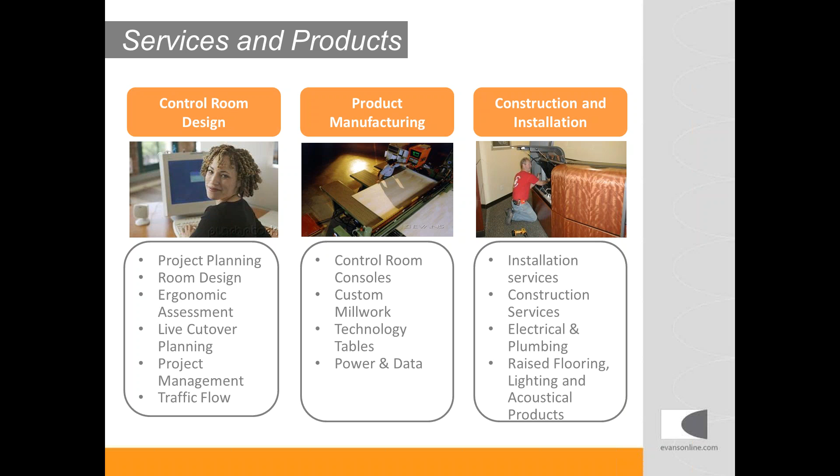We do project management, traffic flows, and then we have the core part of the business, which is product manufacturing - consoles, custom millwork, technology tables, power and data solutions, specifically designed for the 24/7 control room environment. And then we have a construction and installation team, ranging from installations of product to construction services within the control room - electrical and plumbing, raised flooring, lighting and acoustical - and we do this specifically for control room environments. So we're not a commercial construction company. We very much focus on control rooms themselves, particularly when talking about modernizing or upgrading an existing facility.

Our market approach: we approach the market by working either directly with end users, typically in a very early stage when they're talking about operational planning tasks and how they want to structure a control room. We will work with architectural companies who will hire us as a subject matter expert in control room design to help them complete the overall design package of a facility.

We'll work extensively with system integrators, large and small, depending on the size of the project opportunity. We'll work with general contractors who could be in the execution part of a project, EPC providers, and control room partners. So we do have very much a mixed approach to market. Again, this leads to exposure and a broad understanding of how the engagement and execution process of control rooms works.

So to get into the presentation, the role of the control room as we look at it is you've got several processes that influence the control room. You have information coming in, process control systems such as DCS, SCADA, etc. You have process requirements in a given facility on how it needs to operate, whether they're regulatory or business practices. And these things have to be interpreted by a control room.

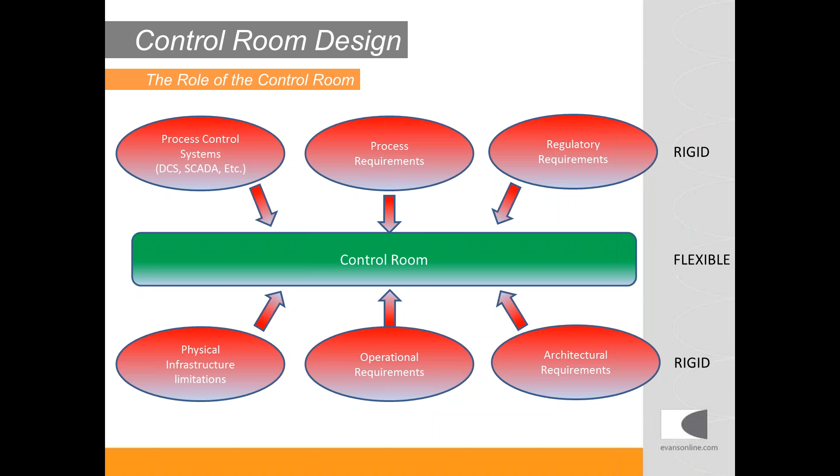One of the things to think about is that focusing purely on the operational aspect of a control room can have really bad effects on the operation. Today we're starting to see technology really increasing the flexibility and integrating incompatible control mechanisms into one, and we'll get into that a little bit later.

Looking at control room design early on in the process is very beneficial because it helps mitigate risks, but it also significantly reduces costs because early planning and being able to understand the implications of the control room design on operations can be very beneficial.

Things to look at are how a control room functions in normal operations, in upset process scenarios, what the emergency operation is, and looking at the continuity of operation. These are critical factors to be considered.

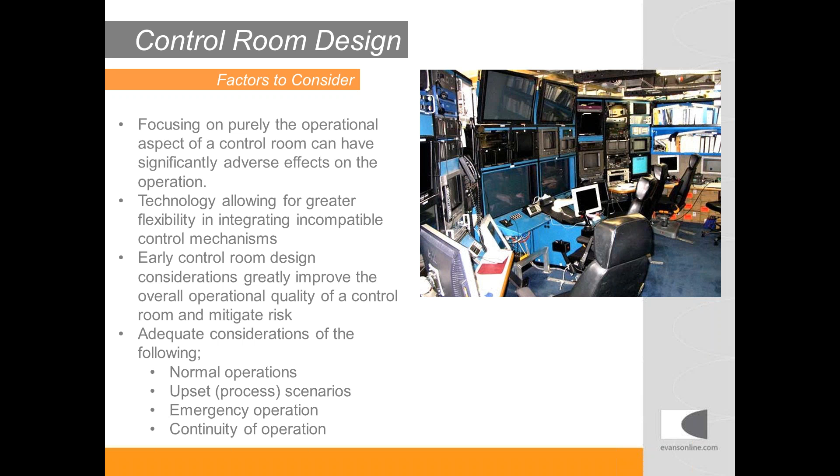I like this picture as a bad example of how to structure an operation, because as you can see, things are not well thought through. They're sort of just put in place. There are cables everywhere, the displays are not positioned properly. So taking all of that into account is vital.

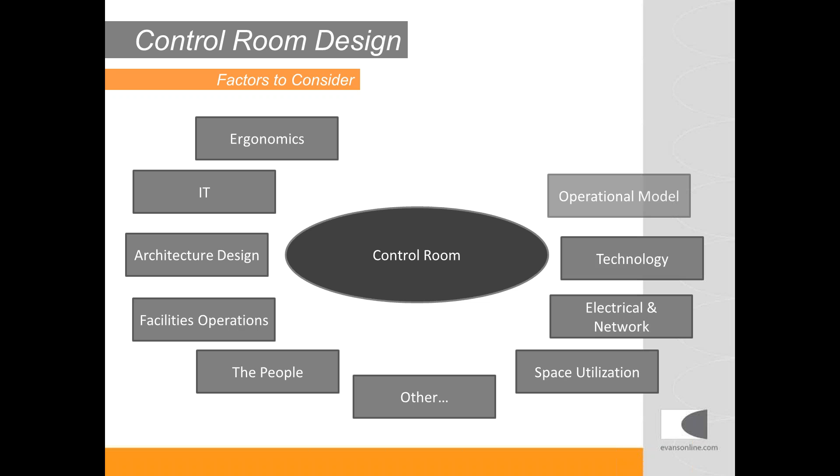When we look at the different factors that influence the design of a control room, there are the obvious ones like ergonomics, which a lot of people talk about, but there's also IT to think about—how is data being managed? Is it local or remote? Do you have the adequate channels to get to the control room?

There's also the needs of the technology integrators—what are their needs in terms of server room placement, heat generation, what kind of infrastructure they need outside the control room, within the control room, and communications?

What is the operational model of the facility? What is the management mission, the facility mission? What technology is available? What's the electrical and network infrastructure—understanding where it is, how it is supplied, and how it is going to be distributed.

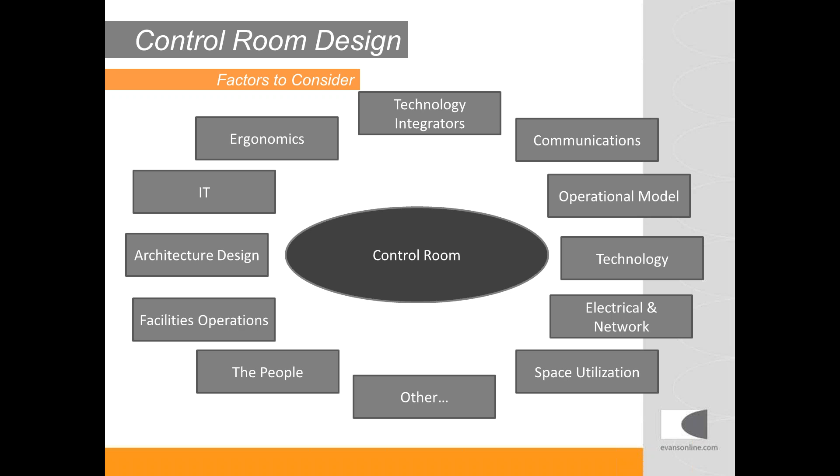Space utilization means understanding the people—what is the profile of the folks working within the operation? And then also looking at facilities because they have their own constraints. These are all stakeholders that are important to consider when you're looking at the design of a control room.

I have this simple chart that talks about, at a very basic level, what a control room does. You've got essentially an operator that's interacting with technology. In some control rooms, you might have 2 or 3 or 50 or 200 operators that are all interacting with that same technology, whether it's a DCS system, SCADA, security monitoring, or whatever it is.

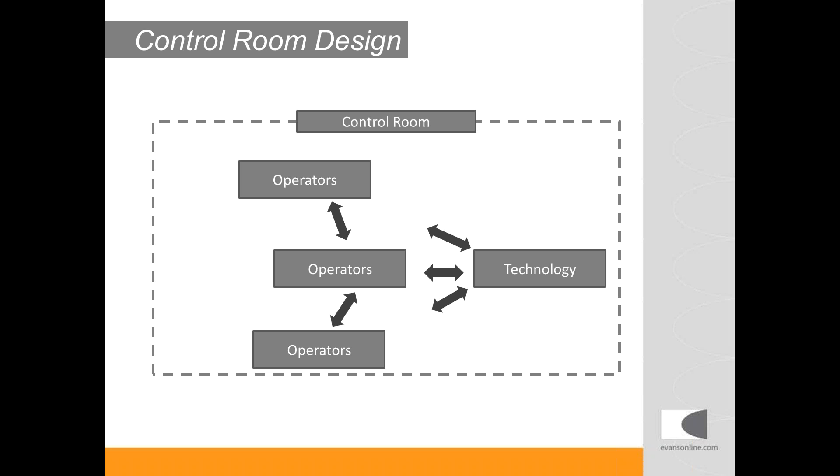Then you have the interaction between operators. Typically within a control room, you also have a management level or supervisory level, and then some immediate outside stakeholders like IT support or building maintenance. All these folks are tasked with ensuring that the control room operation is running correctly.

Then you have outside stakeholders. If you think of a refinery, you have folks on one end who have certain requirements to the control room, whether it's tag in, tag out, or service maintenance, and then people on the other end of the process who are being dispatched to address a certain issue. All of these folks have a requirement to communicate with each other.

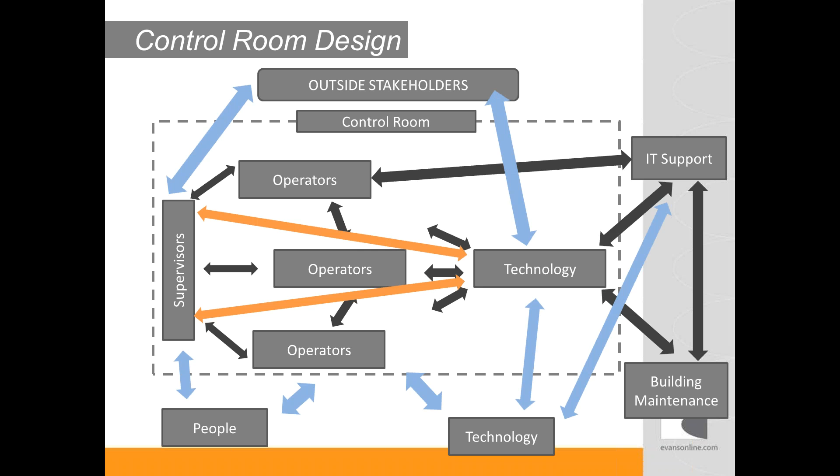When you start looking at the broader aspect of a control room, this really is a complex and unique process for each environment. We always like to say that no two control rooms are the same, because each of them has very specific needs operationally and from a space standpoint, so you really have to take all of it into consideration.

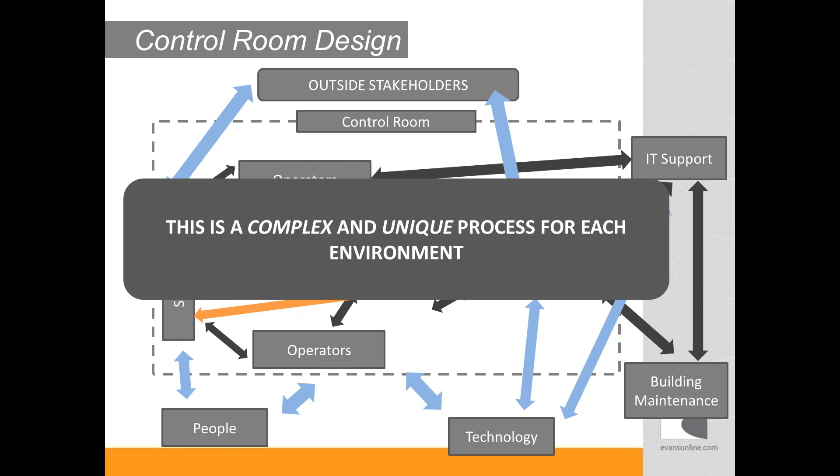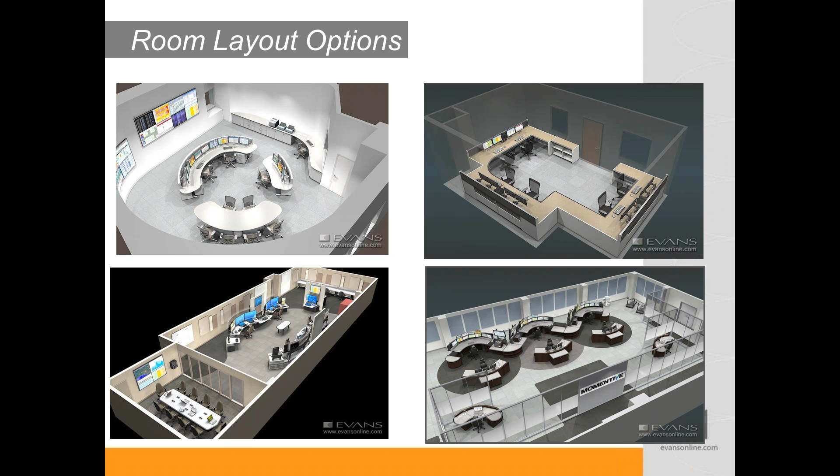You're seeing some images of different room layout options. All of these rooms actually have the same process control function, but they're designed radically differently, because they're tailored to a specific need and requirement. So there's no real out-of-the-box solution. What you need to think about is the flexibility to adapt, and with the rigid constraints we talked about, that's what we really want to be able to adapt to within a control room environment to create the best possible scenario.

Some of the things we look at is not just the control room, but also what's around the control room. What is the control room interacting with? Where are the break areas? Where are the washroom facilities? Where's the server room? Does the emergency operations center have access to the control room or not in an upset scenario? All of these things are important to consider as part of the design process.

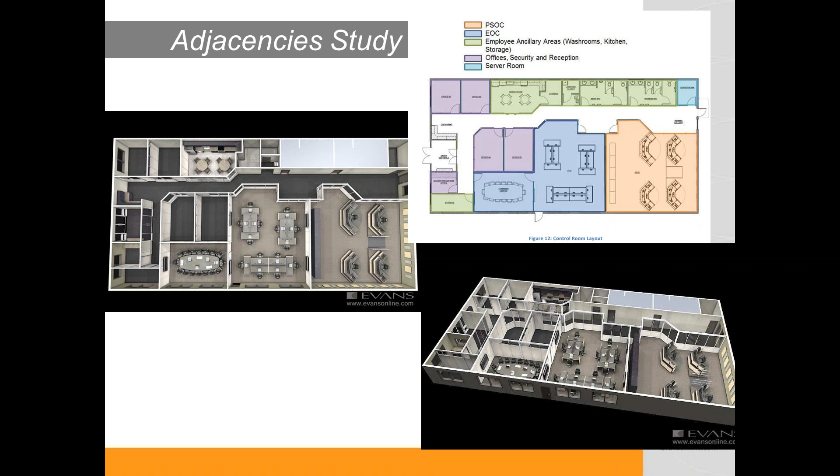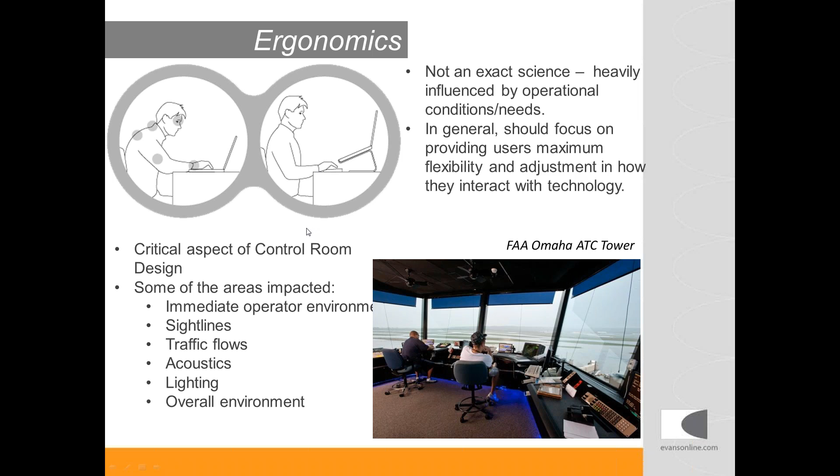But the other thing about ergonomics that most people don't recognize is it's not just about physical ergonomics, which is your posture and how you reach and see things in your immediate environment. There's also a significant aspect of cognitive ergonomics: the ability of a person to process information cognitively. Think of questions like how many alarms, visual and audible, do they have to interact with? How many conversations or phone calls within a shift or when responding to a certain process? What's critical is understanding, as part of operational planning, whether this person has enough capacity to process all of this information effectively, without missing alarms or failing to communicate adequately with others in the process.

So cognitive ergonomic review is vital within the control room. Then there's the organizational aspect of ergonomics, which looks at the structure of communication, human interactions, positioning of supervisory positions versus operators, who needs to see and talk to whom within the control room, what the visual cues are, and how the whole operation is structured. This is also where we look at normal versus upset scenarios, because that has a significant impact on the control room. Some argue a control room is really designed for the 1% case of responding to that critical upset scenario.

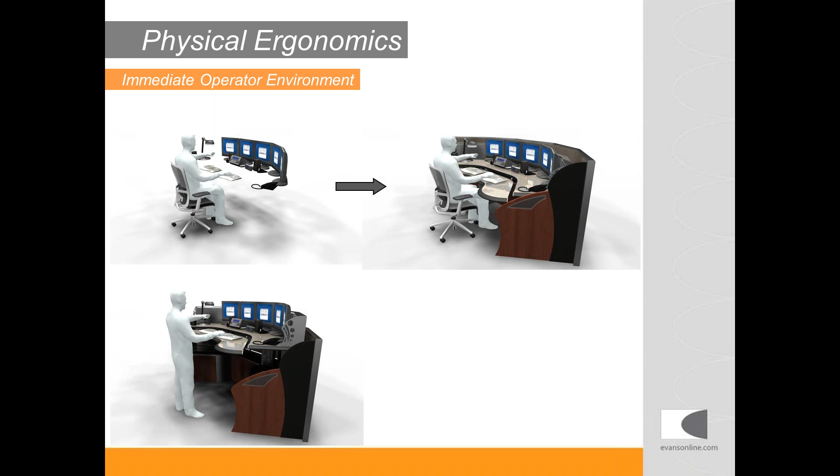From there, you start working outwards, looking at the technology and ergonomics of the position. In this case you can see it has a sit-stand application, so the operator can be seated or standing. You can have a split input platform or not - there's just different approaches. Then from there, you start looking at interactions and clusters within the control room: who needs to see and talk to whom, working your way out while understanding the core constraints.

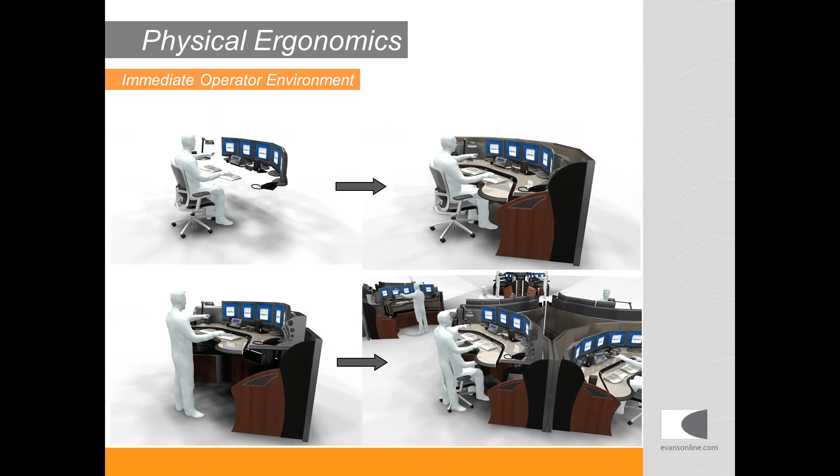A big part of ergonomics is the audiovisual side, and it's not just ergonomics, it's also operational. AV technology is evolving significantly over the last few years. It's really gone from being a visual pretty tool to a critical aspect of operations.

A lot of people, when you ask them what's AV, they always think about these large, big video walls, but really that's not what it's about these days. There's a very big differentiation between hardware and software, and the reason I say that is because the hardware today is becoming more and more commoditized. It's the software that's becoming the critical element. And the AV system needs to really be flexible to cater to the operation.

One example, you can see the upper image of the control room. You can see the different types of displays being used. You have a 24/7 wall that's monitoring - in this case it's a SCADA grid - but you also have peripheral information walls that utilize different types of technology, and it's all brought together by being able to switch and manipulate content.

This is a real emerging trend within control rooms: being able to have custom layouts for each operator based on their preferences and access rights. So what information is seen either on the operator position or common display is becoming more and more flexible, and it's able to bridge multiple technologies.

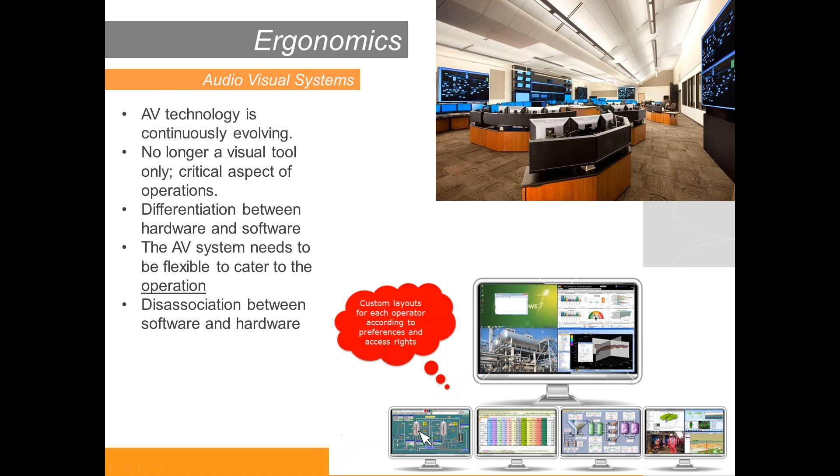Also, looking at a control room, what kind of environment do you want to build? Do you want to have AV as a collaborative local display? You can see that in the bottom right-hand image, where you have an operator, and then when the need arises, there's collaboration at the local control position, versus on the upper right-hand corner, where you see more of a traditional approach where all of the different operators are viewing a common display wall.

Now keep in mind, there are some customers who like to put in a common view simply for marketing and promotion services - they just want their control room to look great. Others have a very key operational interest to be able to have a system like that. So it's things to consider and questions to ask.

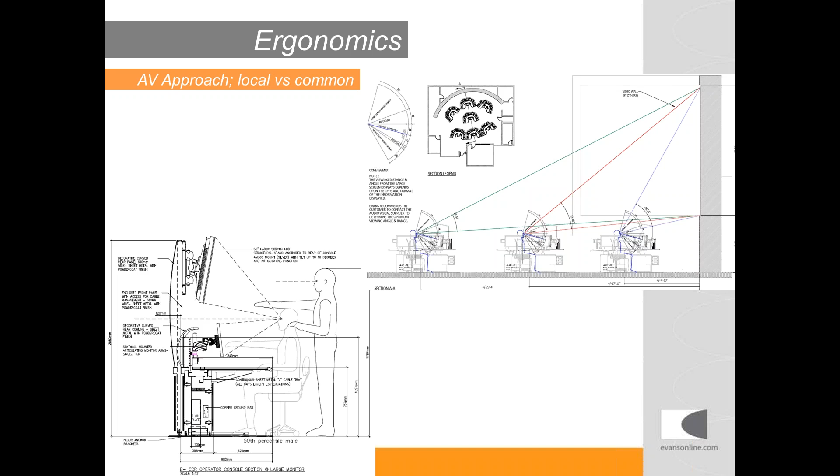This is an example of the localized collaboration station. We're seeing this particularly in pipeline control, in some of the refinery applications, where you have localized common viewing, and with the ability to easily switch and provide content, you can pretty much configure this common display to whatever you want with a click of a mouse. It allows people to huddle around and address a specific issue, and we're starting to see this as a more significant emerging trend within control rooms.

So you can see that really this station has two separate functions. One is tailored to the operator, which is the lower row of screens. And the second one is the common display that can be adjusted in height, in depth, and all these different aspects to provide a collaboration environment. This approach versus the traditional large cube display approach also provides significantly better cost savings and flexibility into the future.

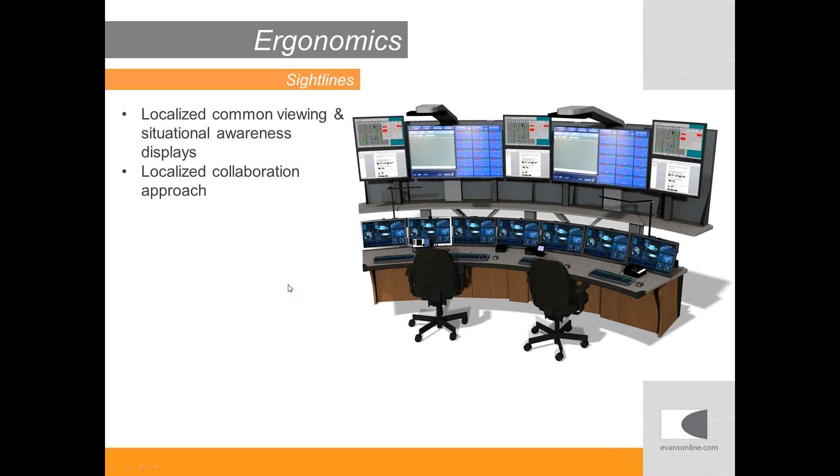But what it's used for is the back management and supervisor level that are actually looking at an overall view of the function of the operation. So they could have a PI historian, or they can have different types of display information on there that's telling them the efficiency of the process.

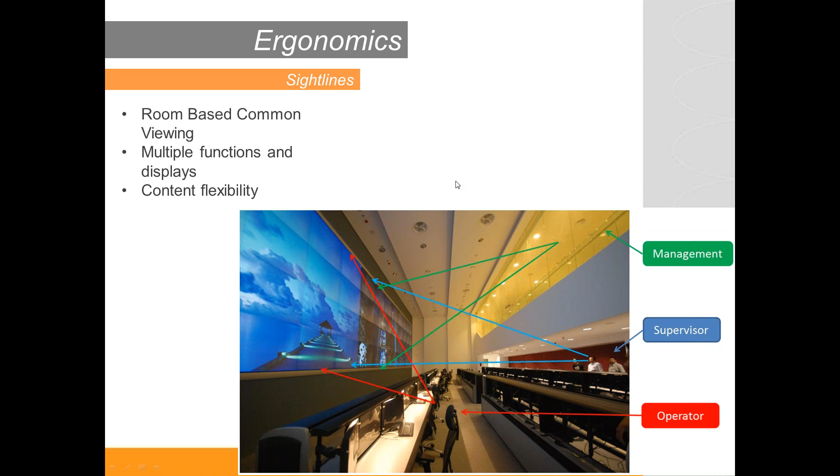And then the third aspect is management. What this particular control room does is its products are promoted to some very high-level customers who want to see the integrity of the operation. So you can see the viewing gallery on top, and they have a vested interest to display the function of the control room adequately. So each control room is unique.

Looking at interactions and traffic flows, this is a critical element, particularly when you're talking about access, security, who can be within the control room environment.

One of the frequent questions we get asked is, should management have access to a control room? In a lot of cases, the answer is no. You want management to have separate access into an emergency operations center, but not actually be able to go into the control room, because they want to have the operators focused on resolving the issue at hand. So doing a proper interaction and traffic flow study is critical, so that you can in advance determine

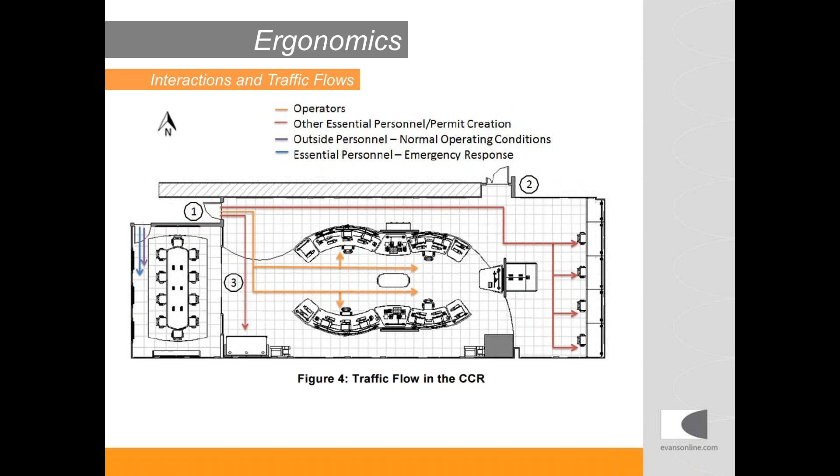how many people would be in the control room during an upset event. Lighting is one of those things that's becoming more and more prominent in control room design, particularly as LED technology evolves. It's a key element in mitigating operator fatigue and just creating a better environment which promotes alertness, etc.

One of the things that's really being researched extensively is circadian rhythms. So our body does not respond the same at 2 o'clock in the morning versus 8 in the morning. And with research and some lighting zone technology that's been developed, control rooms can now really mitigate that by changing the ambient lighting and really being able to, for lack of a better term, trick the body into adapting the environment to the normal circadian mode that it's in at a given time.

So obviously LED technology is big. Things like using indirect fixtures, having the ability to have dimmable lighting, having the correct material selections, and having adequate individual task lighting to offset the general control room illumination.

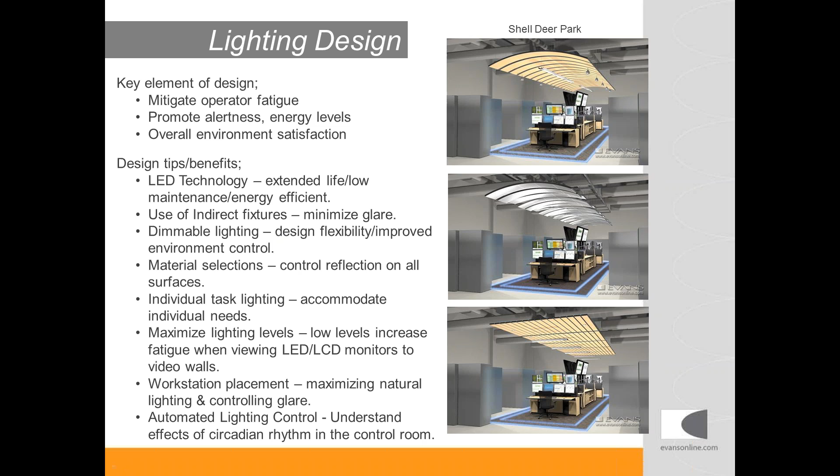It's a very important aspect of control room design that should be looked at. And this just shows you an example of integrating lighting both at a personal level. So these LED lights that are on the console positions themselves, they can actually be tied into process alarms. So each station can illuminate in a different color, and it can just be another layer of visual alarms that's easily visible to the entire control room, especially to supervisory staff if there's an incident.

Acoustics are very similar. Often you'll walk into a control room, and because of the way they're shaped, there's going to be a significant amount of bounce and reverberation within the space. And with the evolution of display technology and having such a huge area of flat displays in front of the operators, the bounce really needs to be considered within the control room.

And when you look at it, this is why it's important to understand interactions, traffic flows, where the break areas are. And doing the acoustical design is both relevant to the room itself, where you can see acoustical treatments on the wall, and you can see the lower images make it a lot more aesthetic and conform to a specific client. And then also the product itself, how is it clad? You want to try to bring in maximum absorption, look at the appropriate carpet tiles and ceiling tiles that have the adequate NRC rating to be able to absorb a lot of that bounce and noise within the control room.

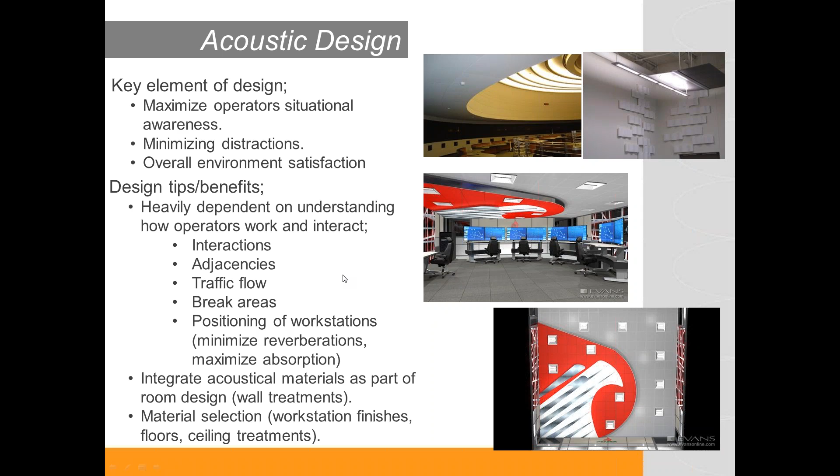And again, this is just an example of where you have a building constraint. In this case, the building was built in the 1800s, so it wasn't going anywhere. But being able to treat the ceiling and the carpet and the walls in such a way to provide maximum absorption, and because these operators communicate a lot with external stakeholders, there's a significant amount of noise. So being able to mitigate that within the control room design is very important.

The next area I want to talk about is technology. So what really influences the life of a control room? Most control rooms you want to be able to operate between 10 and 20 years on average. So there's the obvious, the quality of the build, but then the ability to adapt to changing mission requirements and the ability to sustain growth and technology change.

And really, quality of build is a given. That's something that's fairly easy to ensure by making sure that the providers are all reputable and have good products and warranties. But the two areas that really need to be thought about early on is the ability to adapt to changing mission requirements and technology change, because those are the two things that are most likely to evolve, especially in today's day and age.

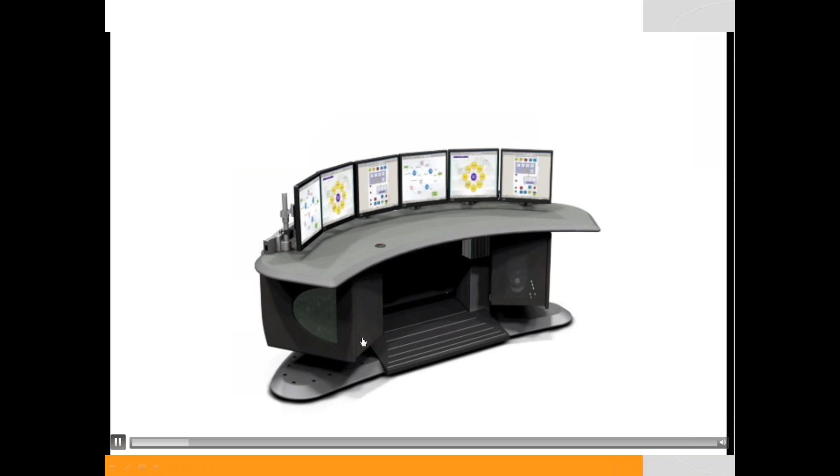As an example, when you look at a typical operating position, you can see this one has a row of monitors and CPUs. It's very likely that's going to change over time, where the CPUs might go remote, so you want the ability to remove them, strip the structure, replace the single row with large screen displays, replace the keyboards with a touch screen, and be able to add large panels. So it's being able to think about product flexibility moving into the future.

One of the main reasons control rooms don't change is because it's too difficult, and therefore customers lose out on efficiency. If you can make the change quickly and cost effectively, the end user can continue to reap the rewards of implementing newer, more efficient technology quickly and at a low cost.

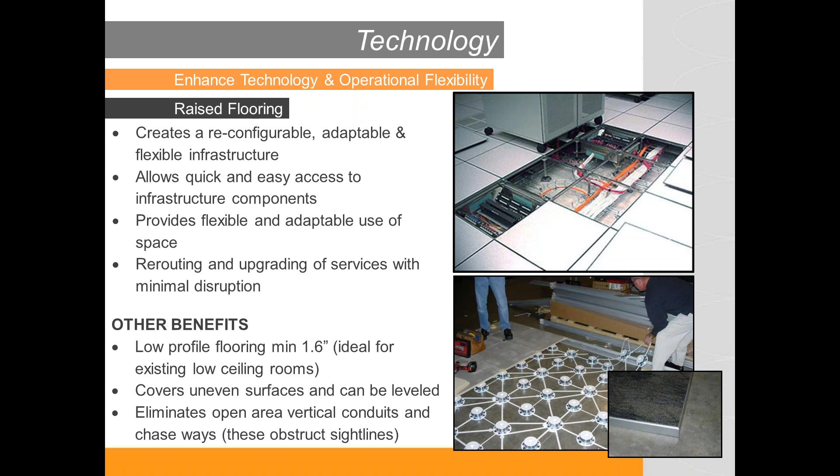One of the things that always surprises us is raised flooring, and how many control rooms don't consider it. A lot of them, especially in buildings built 30, 40, 50 years ago, don't have adequate raised flooring. Our recommendation is always to even use a low profile floor, as you can see here, which can be as low as 1.6 inches. It still gives you flexibility to reconfigure the space down the road and have adequate cable management. For a lot of people this is a given, but it's surprising how many end users don't understand the importance of using it.

The other part that's really changing in control rooms is modular power and data. The picture in the upper right corner shows the mess that cables under the floor can become. What's really evolving within the control room is modular power distribution. You can see here on the right-hand image, this is a modular power distribution system, and each of these carries three 20 amp circuits to be distributed across the room.

This allows customers to run all of their power distribution - UPS 1, UPS 2, and dirty power - within one shielded cable to anywhere in the control room. Where there's a raised floor, you can run the power distribution systems easily to each operator position. Where there's a slab floor, you can run the power distribution system to the beginning of a console and then run the rest through modular units, so you don't really need a raised floor to distribute the power. The advantage of this system is being able to switch and move positions around without significant rewiring under the raised floor.

And for those operating in North America, the additional advantage is a fully UL certified system, meaning you don't need an electrician to do any of the work within the control room, which provides substantial savings in project execution.

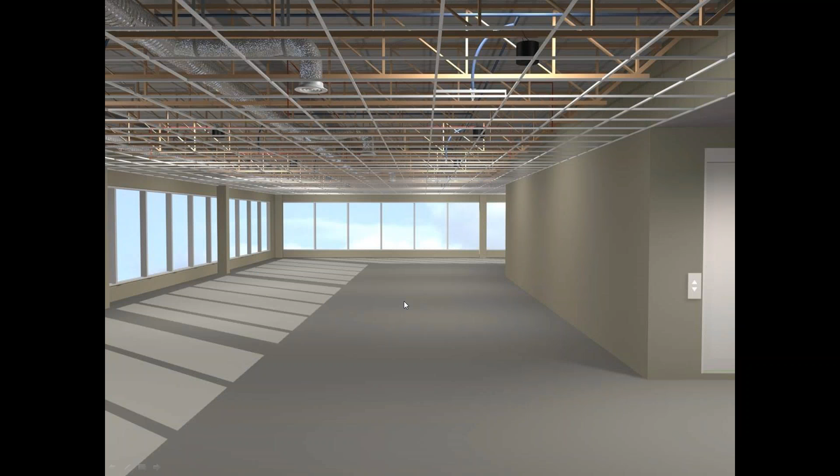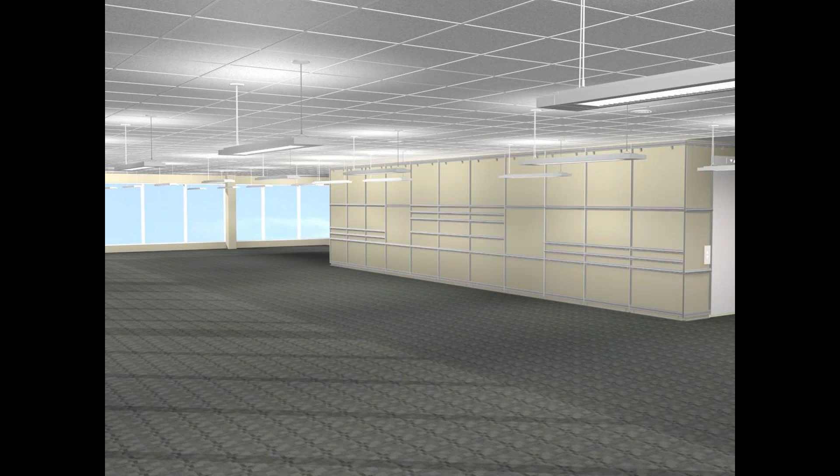One of the other things that's really evolving is flexible wall technology. When you look at a completely open space, using modular walls and raised flooring allows you to adapt the space to a specific operational need for a certain period of time and then quickly reconfigure. You can see here how this wall can be used to start building separate areas - the walls carry the same modular power and data distribution, and from there you can start building functional enclosures within the control room.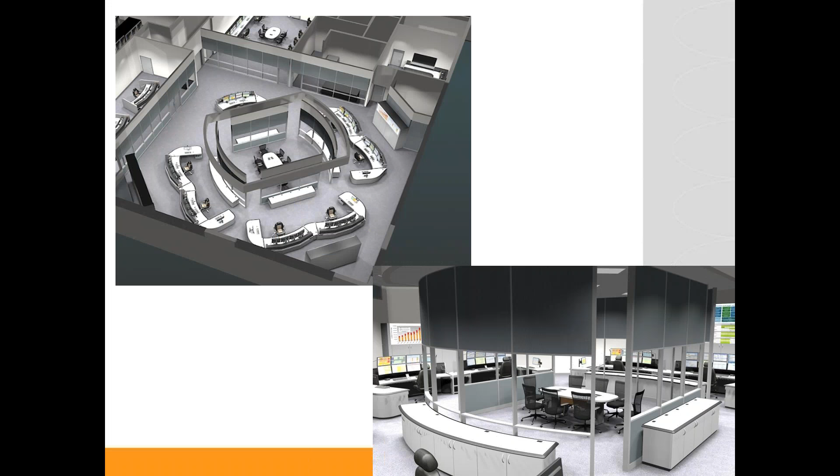The advantage of this is that because it's not brick and mortar, it's very easy to reconfigure. You can see how you can build out an empty space into a specific operational environment. In this example, a customer in oil and gas had a building built as an open space, and all these different functional areas were achieved by designing dropped ceilings and movable architectural walls. We were able to create specific operating areas within the environment that are also going to be very quick to reconfigure down the road.

And then the last thing that I want to mention is the people. This is where there's a significant change happening. The workforce profile is changing significantly, as you're starting to see a lot more people coming from university and the Gen Y and folks retiring from different industries.

But the change is that folks coming out of university, or if any of you have kids in high school right now, they look at a single screen, and this is just a snapshot of Windows 8, and they are now able to process information from a single platform and medium. So they'll be looking at one screen, and they'll be reading the news, watching a video, following Twitter, so multifunctioning within a given screen.

And what's happening is that change is starting to come to a lot of process control and mission critical applications. So here's an example of a DCS system in a conventional way, where you have the operators in their 40s and 50s, looking at one screen for one specific information feed. You can see here there's 2 DCS systems covered by 4 screens, and then you also have 3 DCS keyboards and 3 auxiliary keyboards underneath the work surface for a total of 6.

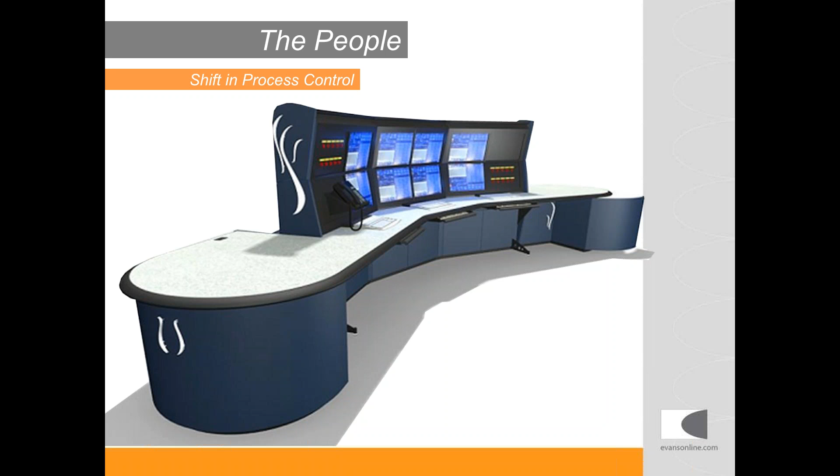Where technology is moving, all of this information is being moved into this type of system, where all of the different displays are going into a dashboard type approach, and there are quite a few early adopters who are moving all of their keyboards into integrated touchscreen systems. Now, this is not an easy transition.

If you are acting as an integrator or technology provider, part of the challenge is getting control room operators to understand the technology and be able to transition to the change. So part of what we do is we talk to operators and understand what the risks, advantages, and disadvantages are. Not everybody is ready to embrace this technology, but it is becoming more and more prominent because it just offers substantially more flexibility. This, combined with a very flexible audio-visual software system, really enhances the flexibility of the control room.

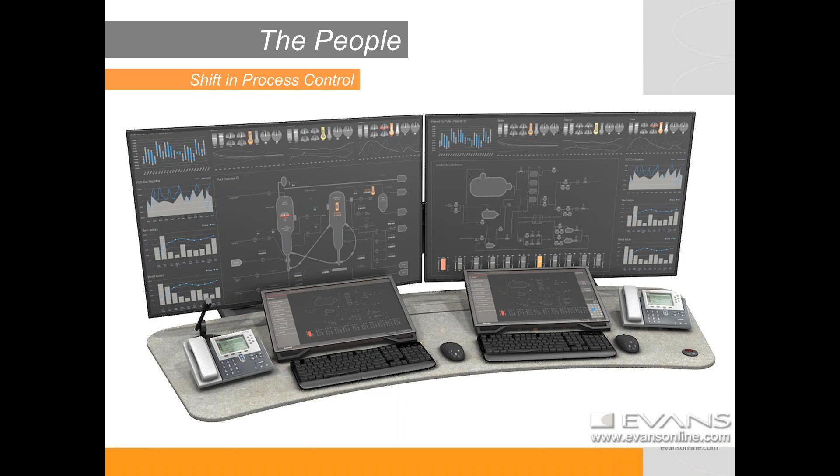And the last thing I want to mention is how simple technology can be used to greatly improve the efficiency of an operation. So the video I'm going to show you is an example of the interaction between an emergency operations center and police and fire in the field. This was taken during the floods in Calgary in 2013, where you had the EOC directing the evacuation of about 120,000 people because downtown was getting flooded.

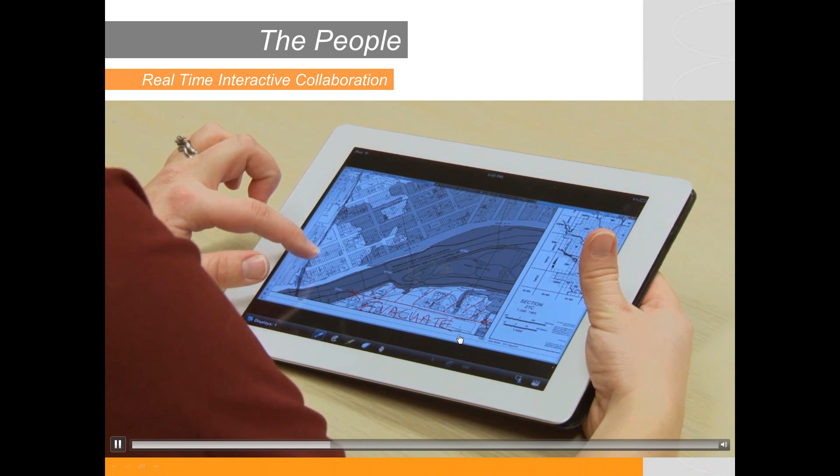But what I want to show you is how to use a smart board, a simple smart board, as a communication tool. So you can see the EOC is making the decision to evacuate a certain area. As they're saying evacuate, with the proper planning and IT permissions, all of the folks that have the appropriate permissions in the field can see this information displayed on their handheld devices, and they can interactively communicate back with the emergency operations center, as you can see. So they're saying, hey, we need to evacuate this area as well.

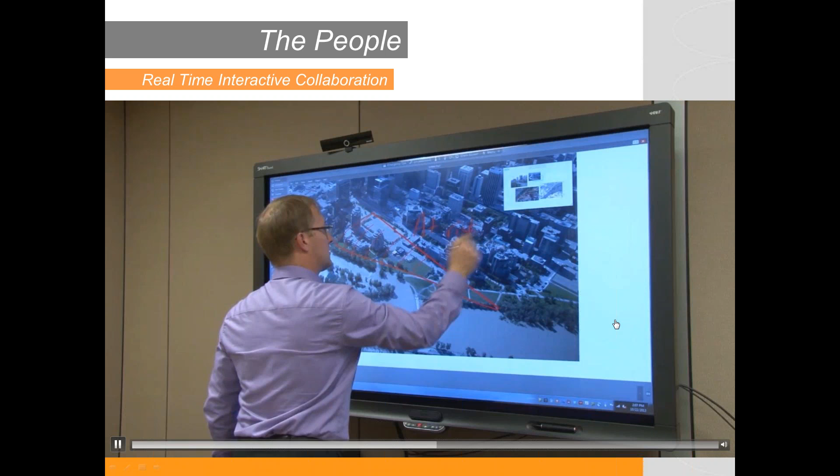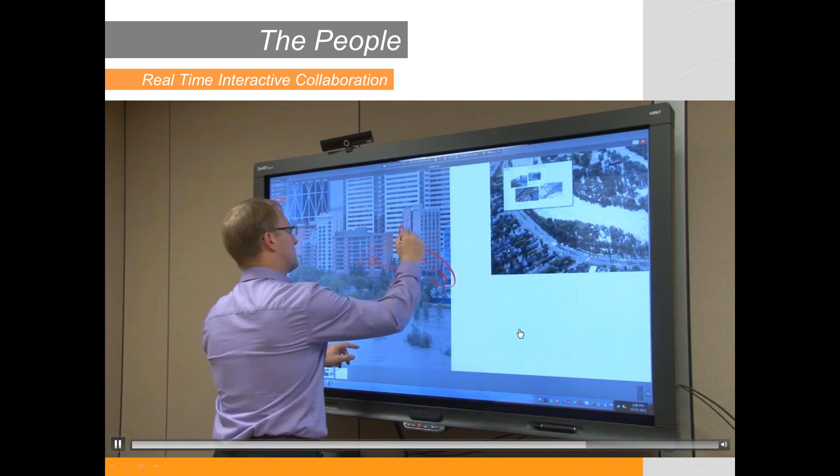Also, they're using common feeds, network feeds, public feeds, to be able to gain real-time information and pictures from the field. So you can see the water rising, and they can say visually, instead of saying an address, they can say, evacuate the red and the brown building here, because the power systems are failing. So it's a very interactive additional layer of communication.

We're starting to see this being used in refineries, where a problem with a process control hardware piece can be communicated via picture. Control room operators and others in a response center can pull P&ID drawings to quickly identify what part needs to be replaced. So it greatly improves efficiency and communication. And again, this is a simple off-the-shelf tool that with the proper planning can easily be integrated into the system.

So, in the end, in conclusion, why is control room design important? Well, the obvious part of it is it's a validation process to ensure conformance to standards. It's proper consideration of human factors, occupational health and safety, disability acts, involvement of key stakeholders in the process, and really creating the optimum operational environment.

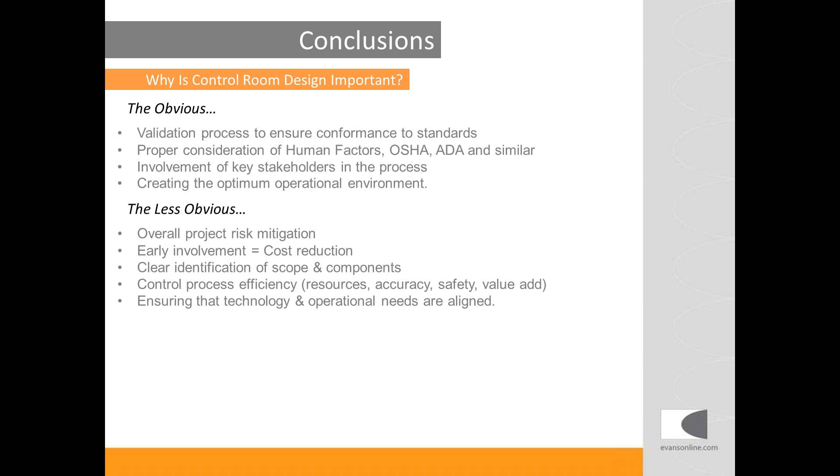What is a little bit less obvious, and what sometimes folks overlook, is it really reduces the overall project risk. Early involvement very often means significant cost reduction, and it's a very clear identification of scope and components, so there's no confusion down the road. And it really helps to increase efficiencies, so resources, accuracy, safety, value add, and it ensures that both the technology and the operational needs within a control room environment are aligned.

Moving forward, Evans can partner with you to extend your reach into your customers, because there's revenue opportunities there, including control room design, operational consulting, turnkey construction, console technical furniture, all these different elements that you can work with. So I wanted to thank you for your attention, and we'll take any questions that folks may have.